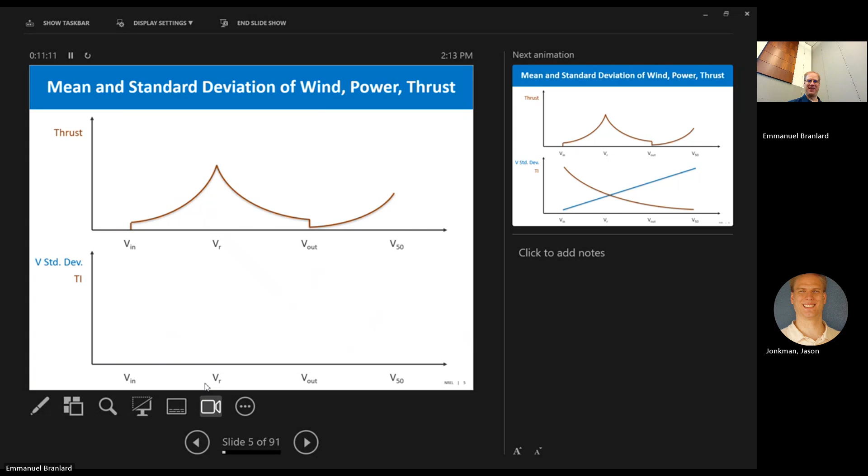So if we start looking at turbulence, what does the standard deviation of the wind speed usually look like as a function of wind speed? Standard deviation constant, increase, decrease? Which way does it go? The standard deviation is large at the beginning, V in, and gets smaller. I'll push back against that. Anyone else? Flip that. So actually, standard deviation tends to go up. TI, I think, is what you're thinking of. TI tends to go down.

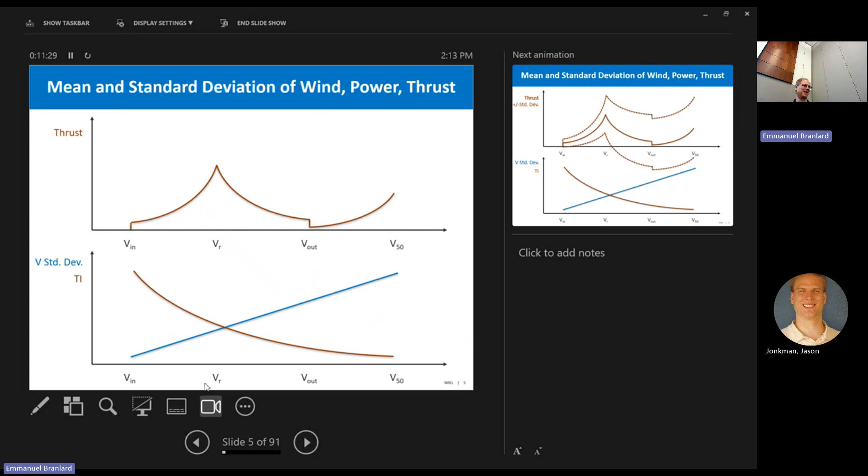That's because you take the standard deviation divided by the wind speed, and the mean wind speed is very low, so the TI is very high. So TI is going down, but the standard deviation is going up, and that's really why you shut down, because that variation is so much larger. If you add the thrust plus or minus some effect from standard deviation, the way I show it here, at cut-out maybe the fatigue is still lower, but eventually that fatigue is going to kill you. And that's why you shut down the machine.

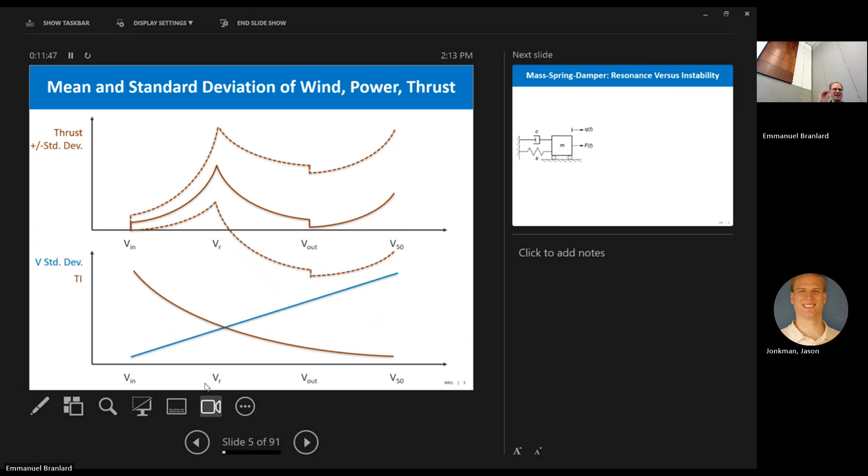Next, I love the simple example. So the mass spring damper system: mass M, damping C, stiffness K, and applied force F. My first question, of course, what's the equation of motion of that system? Just give me the equation of motion. What does it look like? Right, exactly. F equals ma. That's the basic equation I want. What is it for that system? Excellent. So mass times acceleration plus the damping term plus the stiffness term equals the force. So F equals ma for that system.

Great. And then my next question is, what is the difference between a resonance and an instability of that system? So I have a very simple mass spring damper. What does a resonance look like? Was that stored energy? What does it mean in terms of the equations? So if I have just F, K, C, and M, what does a resonance look like?

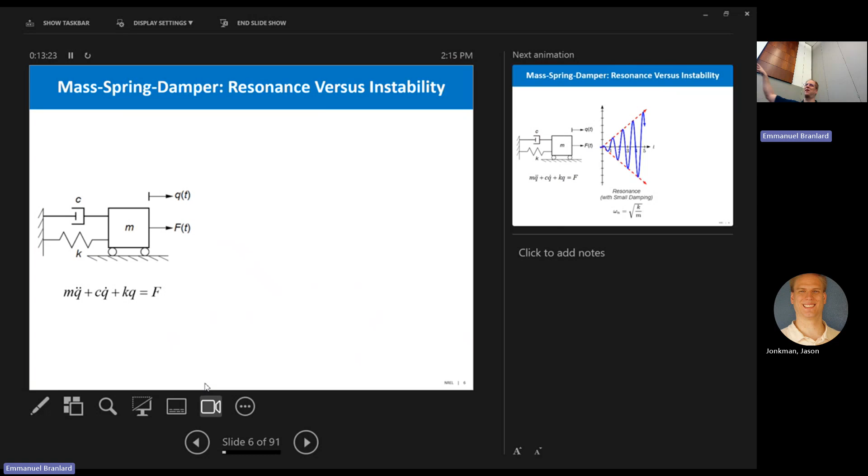Actually, resonance has nothing to do... Well, the damping plays a role, but it's not directly in the fundamental equation I'm looking for. Exactly. So if the excitation frequency F matches the natural frequency of that mass spring damper system, then you got resonance. And what happens in resonance?

Basically, again, that excitation frequency matches my natural frequency. And if you plot that out, it leads to linear growth. Linear growth is pretty bad, but it's not the worst thing that could happen. So if you catch that, you can maybe change natural frequency, add damping, try to mitigate that. So it's bad, but actually instability is far worse than that.

And what's an instability for that system mean? What do you have to do for one of those terms to make it unstable? Negative damping, exactly. So if I make C negative and I do the same thing, boom, that thing's going to blow up, and it's going to blow up exponentially, which is far worse than linear.

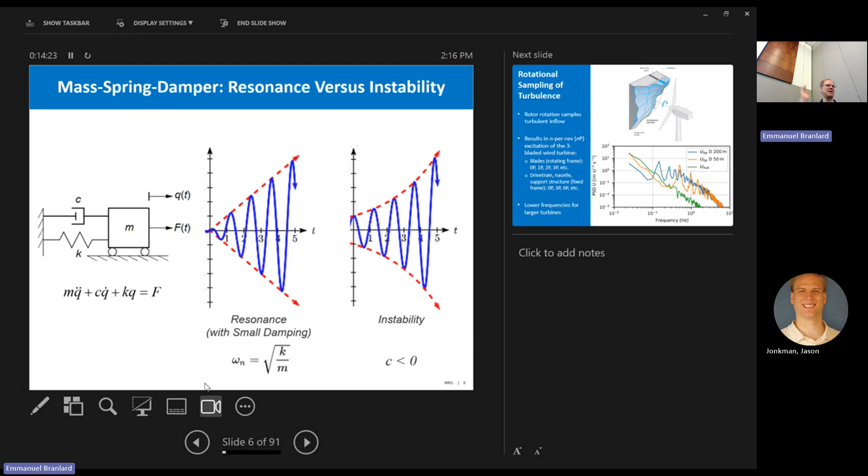So definitely want to get around what resonance is, or if you're in a resonance, you want to pass through it quickly. You don't dwell on it. Instability you want to avoid, because that's boom, that's exponential. That's key there. Another one, rotational sampling of turbulence.

No question here, but yeah, so a turbine spins through a turbulence field, and really what you see on the blade is, of course, the mean load from the wind, but you'll then see a 1P, 2P, 3P, and that's because the blade's chopping through all that, and it's sampling at basically harmonics of its speed.

And then in the drivetrain, and then the nacelle and the tower, you're really exciting at 0P, 3P, 6P. So if you ever look at PSDs of your time series of OpenFAST, you'll see these spikes show up. So you'll see natural frequencies and you'll see these excitation frequencies. Again, the resonances are where these excitation frequencies align with your natural frequencies.

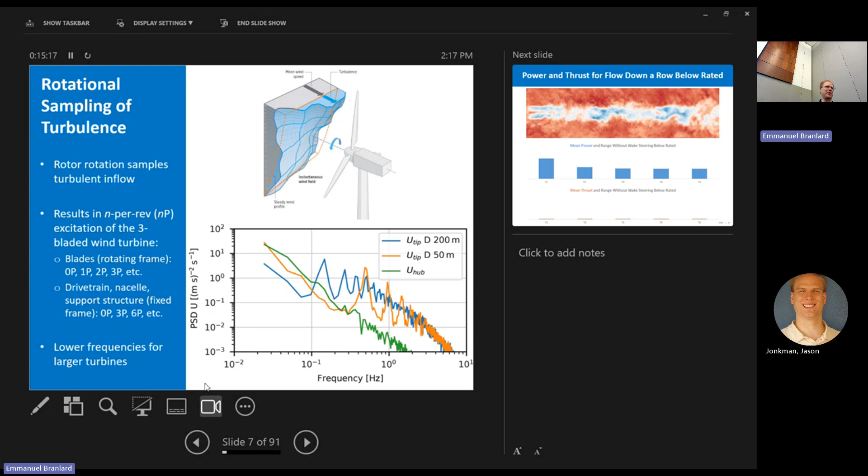And another thing maybe important there is as you get larger and larger turbines, you're spinning slower and slower, these frequencies are basically dropping. So they're all getting lower and lower. So keep that in mind. Now we take that to the farm level. So a little too far there.

So now I have 5 turbines in a farm. That's showing a FAST.Farm simulation there, I don't really show the turbines well. There's 5 turbines and the flow is moving from left to right. And so now if I look at a simple case, I'm not trying to steer the wake and I'm below rated wind speed, what does it look like for power? Which turbine sees the highest power? Which sees the lowest power?

What's that? On power? I'll flip that on you. So the upstream turbine is going to see the highest power, right? It's going to get the full effect. Sorry, without wake steering, yes. Start simple. So the upstream turbine is getting the most power, and the other turbines in the wake are losing power off that. And what about thrust?

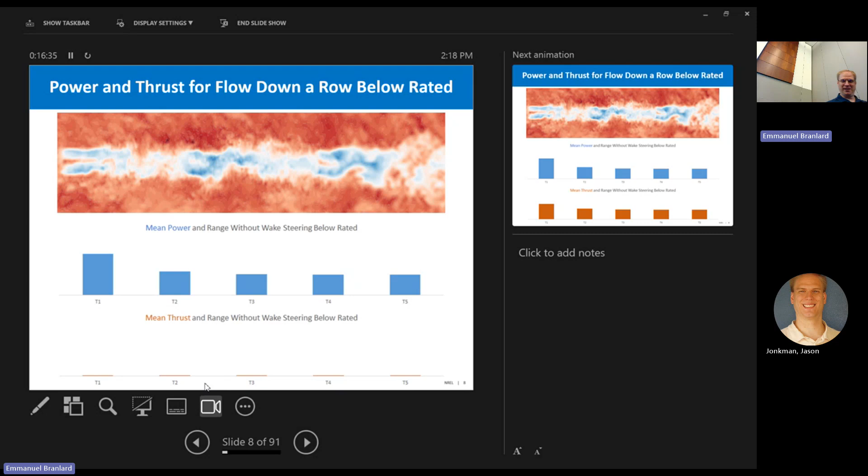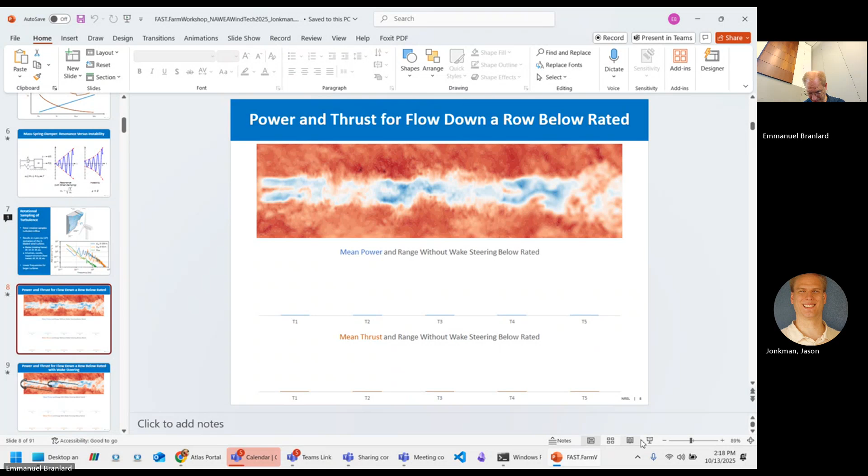So I agree. Same trend. Thrust is lower. So normally you'd say, well, fatigue is higher downstream, but thrust is actually lower. So what's going on? Exactly. So standard deviation now. That's what really changes. And if you're in the FLORIS workshop, you don't care about any of this stuff. You only look at means. And here we're talking about loads. So standard deviation really matters.

So about standard deviation, I try to draw it as a range. So the standard deviation of power also goes up quite a bit. Standard deviation of thrust goes up, and that's really the big problem. Your fatigue loads are going way high. So the mean loads may be going down, fatigue loads are going way up, and that could be a big concern downstream.

Now, if I look at what you were trying to get at, wake steering. So again, I'm below rated, and I have wake steering. What does my power look like now? What is the trend going to look like? Kind of the same? Is it more or less equal throughout the farm?

More equal, yes. I should have showed it before and after, but turbine 1 actually went down a bit because I purposely yawed the flow, but that made the wake diverge away, and I've made overall power more level throughout the farm. Same thing happened to thrust. What happens to loads?

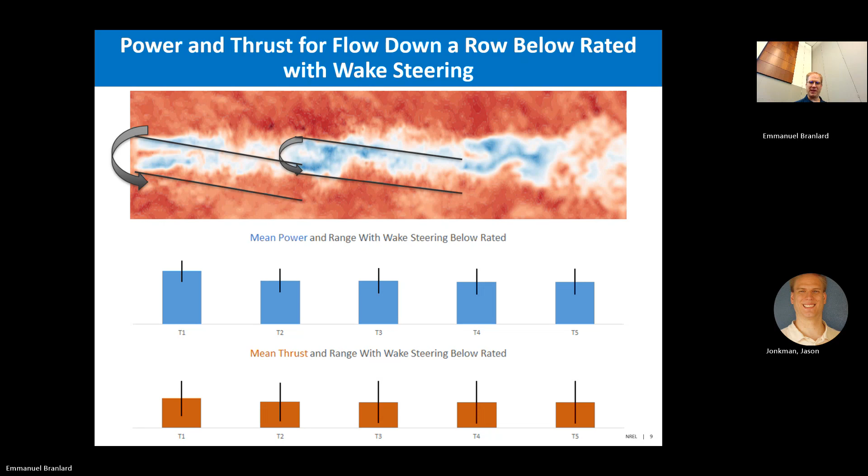Right? This is certainly maybe an ideal case when I'm showing 3 turbines or maybe 5 on the plot. I'm just trying to show the trends. But certainly, if you have some complicated wind farm arrangement or flow directions, these trends could obviously have local effects. Exactly, but that's why you use a tool like FAST.Farm, to answer these questions.

Maybe one more example: I've taken the same case, but I've made it above rated. So now I say winds at 18 meters a second. What's my power look like? What's that? Pretty much constant? Exactly. What about thrust? Thrust reduces relative to the below rated, certainly. What's the trend down the row? Exactly. Good point. Good intuition, Stevie.

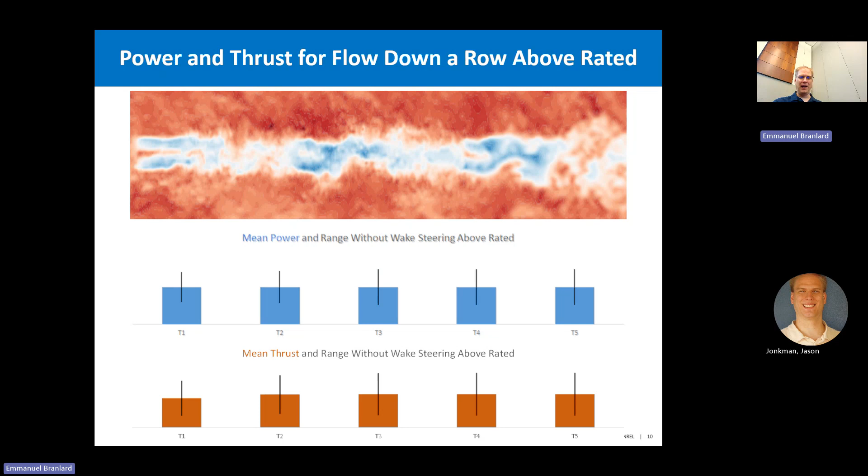Look at that previous curve we showed. The downstream turbines are now in the wake, so their wind speed's less, which means their mean thrust is higher. And so again, power is basically constant. Thrust is also fairly constant because that wake is pretty much diminished at that point. CT is very low. So slightly increased, but not a whole lot. And then standard deviation, again, fatigue could also be important for above rated cases. Yeah, it's not a big increase down the farm for that.

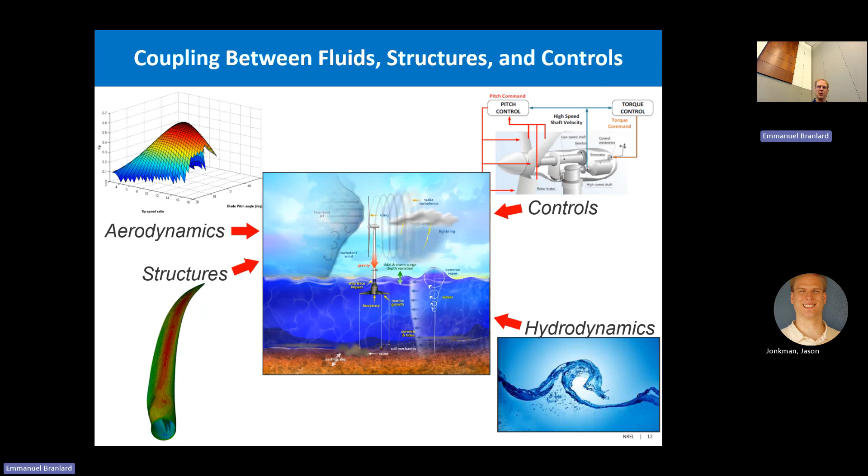Okay, so that hopefully gets your mind around these things again after a long weekend or a little break. Now we'll start jumping into the tools, OpenFAST and FAST.Farm. Really what we're trying to do is analyze the various physics: the aerodynamics of the system, the structural response of the system, hydrodynamics if we're talking about offshore wind, and of course the control system being a big part. It's not just a passive machine, it reacts to its environment through a controller.

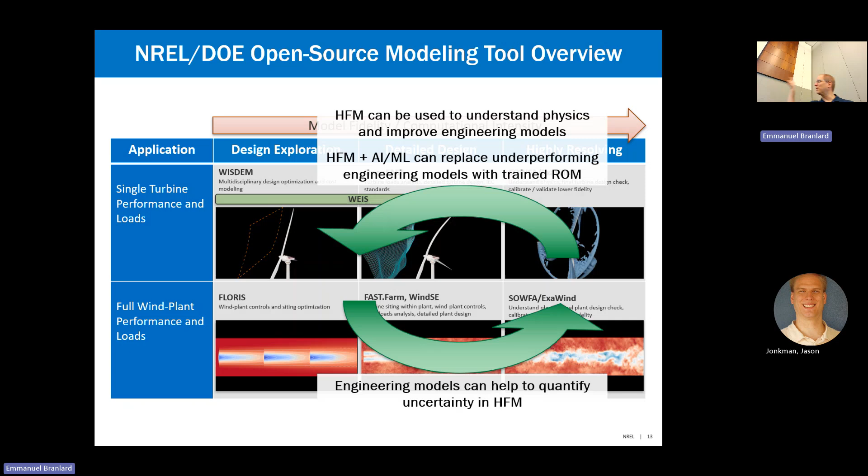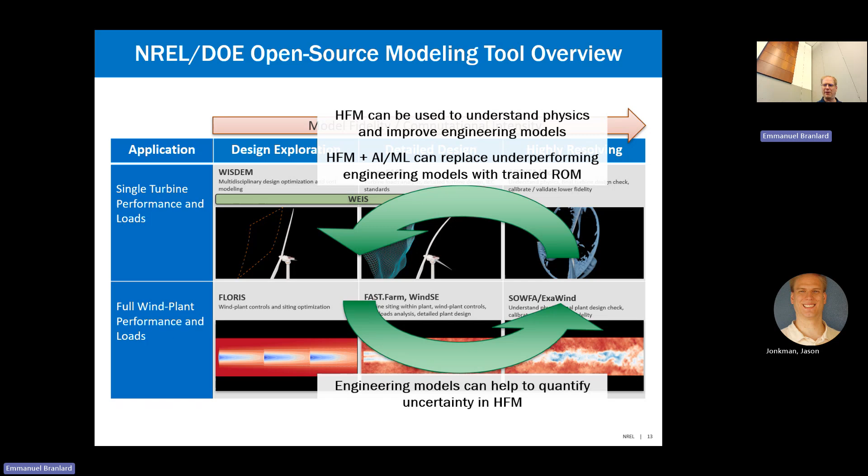And I would say these are very much interacting environments. We use a lot of the high fidelity to generate inflow for the engineering models, as well as a lot of calibration and validation of the tools from high fidelity to low fidelity. And I think this is also where AI and machine learning will really come into play: how do we train surrogates that mimic what the high fidelity is doing. The partnership goes the other way as well, because we can run a lot more cases at the engineering fidelity. If we're trying to propagate uncertainty, it's much easier to do that with an engineering model, so using that to forward propagate high fidelity solutions is a direction I see. But here we'll focus really on the farm level detailed design work.

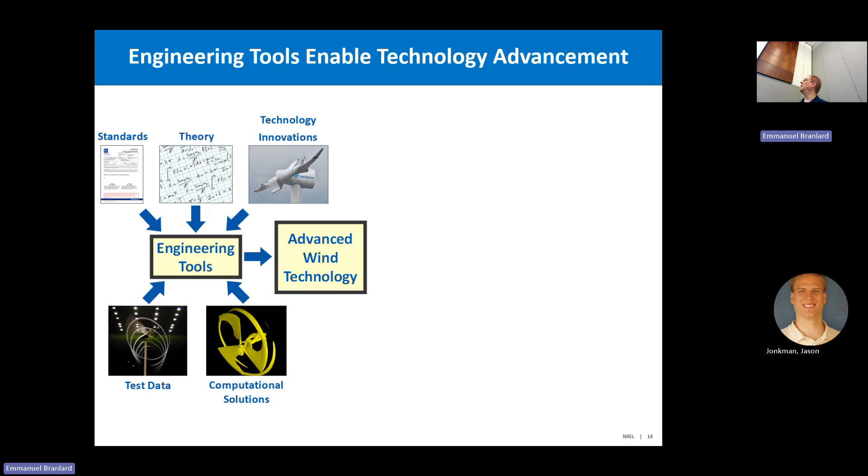Tools enable advanced technology. Because we can't fully resolve everything with CFD and make that computationally efficient, at the end of the day we have to simplify some of the physics, and you'll see a lot of that as we go through FAST.Farm. But based on fundamental theory, and on computational solutions from which we calibrate coefficients of the model, we have an engineering model that can run all the cases we need to advance technology. At the farm level, that's really about designing my wind farm including not just power but also fatigue loads, and all the implications on other technologies. If you're looking at novel rotors, drivetrains, or support structures, you can do all that at the farm level now with FAST.Farm.

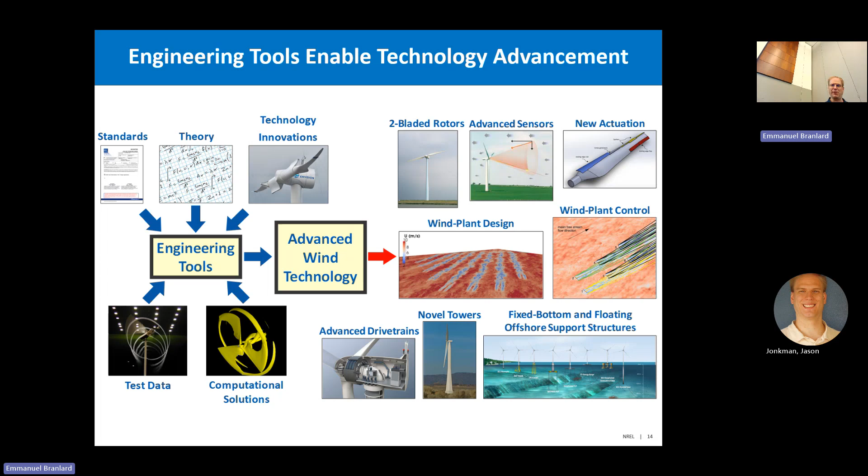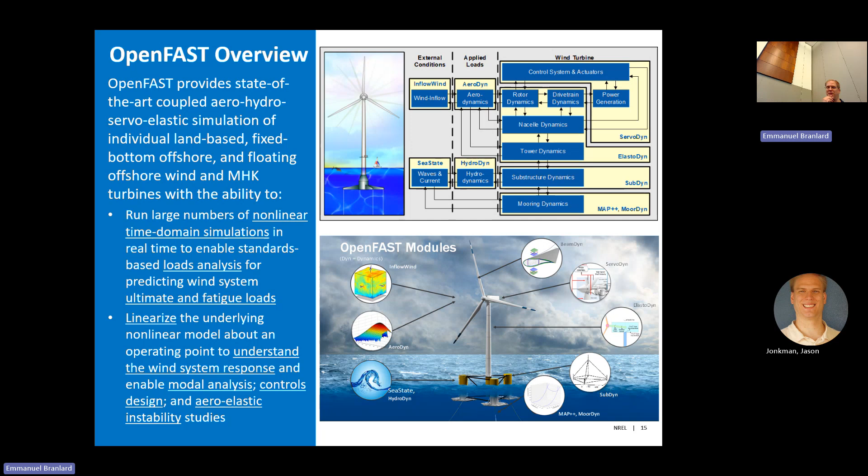We won't go through these in detail, but BEM type aerodynamics, also up to free vortex wake, and OpenFAST beam type structural models, with bending stiffness, EI, GJ type stiffness terms, and of course full hydroelasticity on the floater as well. We won't dive too much into that today. Some of the key things in the framework that I think are still very useful when we talk about FAST.Farm are summarized here, because FAST.Farm is based on the same framework of OpenFAST. So to understand FAST.Farm, we really need to understand the modular architecture of OpenFAST.

And so we have, first of all, everything decomposed in the model in terms of modules. And those modules really have four main components to them. Internally, they have states and they have parameters. So parameters are like the constants of the model that don't change, and states are what you need to know to calculate the things at the next time step. So the memory of the model is what's stored in the state. Inputs are what are calculated from other modules and being sent to a given module. So that's what this module needs to do its solve based on information that's external. And the outputs are what it's calculating for the purpose of other modules.

We use that very much as context for FAST.Farm as well. And as we go through FAST.Farm, we'll explain what are the inputs, what are the outputs, what are the states and parameters of that model. The states in the model, again, this is like the memory of the model. They can be in really three forms. One is continuous time. That's the ODEs that we showed before for the mass spring damper model. You can also have discrete time form where it's really a time step by time step solve. So given things now, I can figure out what it is the next time step, but there's nothing continuous in between. Often you can take a continuous function and solve it numerically with a discrete time formulation. And there's constraint states, like the algebraic constraints of the solve. And other states, sometimes we show things like binary states and so on.

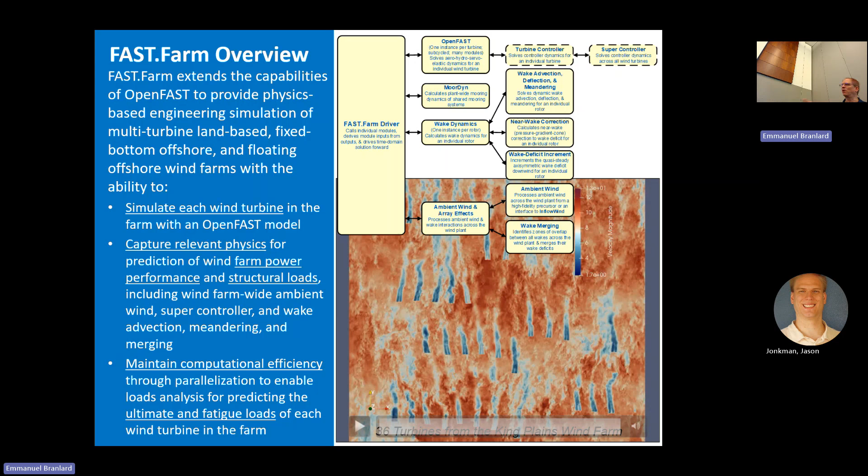But yeah, so the idea is to have one instance of OpenFAST for every turbine, and then modules, and we'll get into the details of those modules that solve the wake propagation, the wake evolution, the wake meandering, wake merging, and that's all part of the solve of FAST.Farm. So we'll jump into those as we go forward. Just make two more points before we dig into the details.

One is on verification and validation. I think this is sort of central when we talk about OpenFAST or FAST.Farm, because we're not fully resolving all physics. It's really important to either calibrate the model against some high fidelity solution, and then finally at the end of the day, validate it. So the reality of interest could be a high fidelity CFD solution. It could be measured data from a real wind farm.

But the validation is really critical, I would say, in tools like this, because there's a lot of these parameters that can be case dependent. So also pairing it with high fidelity is quite critical, with the goal, again, of using these tools for advancing technology. Finally, just one comment.

This is all public open source data under an Apache 2.0 license. And that simply means that we're indemnified. So if you use the turbine and you use the software and it doesn't work for some reason, you can't sue us because you basically have to agree to this license. It's also fully open source, meaning you can take the code and repurpose it for anything. You can even resell it. We can't stop you from doing that. It's a very permissive open source license.

But yes, maybe we'll stop there and ask any questions before we dive into details of what's going on inside FAST.Farm. Anything yet? No. Okay, let's dive into the various modules of FAST.Farm.

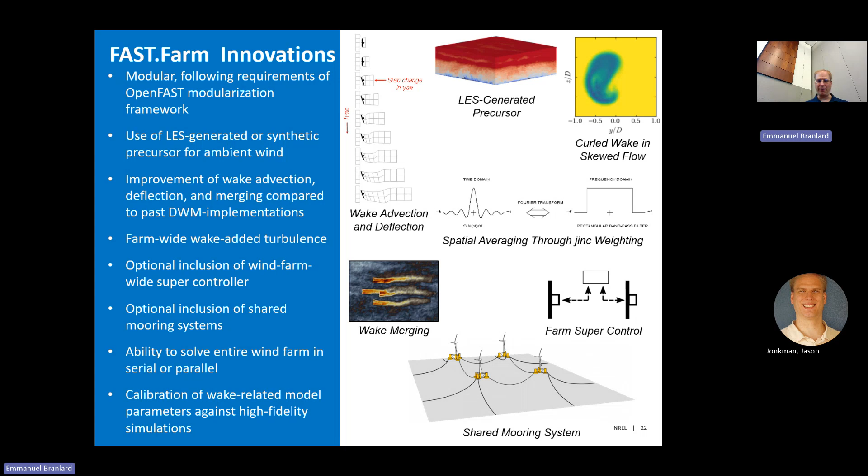The parallelization of the implementation has been done, and I'll showcase some advancements we've been making to that recently to make it a lot more efficient. And a lot of calibration against high-fidelity models. So again, we'll step through those. First of all, some basics.

Basic terminology on FAST.Farm. It really operates on three main things you have to understand for the FAST.Farm solution. First of all, there are two inflow domains. One is what we call the low-resolution domain, and this is a pretty coarse resolution around the whole farm. So wherever there's going to be a wake in the farm, you have to put this domain there, because it's what does the meandering calculation.

So that's coarse both in time and in space, and we'll give you guidance on what the time step and space requirements need to be. But it's really coarse, usually a couple seconds on time step, and 20 to 30 meters, say, for spatial resolution, but it depends on the case.

And then there are also high-fidelity domains, and this is really because the OpenFAST solve, or whatever elastic solve you're using, needs a pretty high-resolution inflow. So you're talking about hertz for time scale, and say chord length for spatial scale. And for the elastic solve to get an accurate inflow, it needs that high resolution.

So we really split out FAST.Farm that way, with the two domains, so we capture the best of both worlds. If you made the low resolution the same res as the high resolution, it would obviously work, but it'd be much more computationally expensive. And then the final thing to keep track of here is the wake planes.

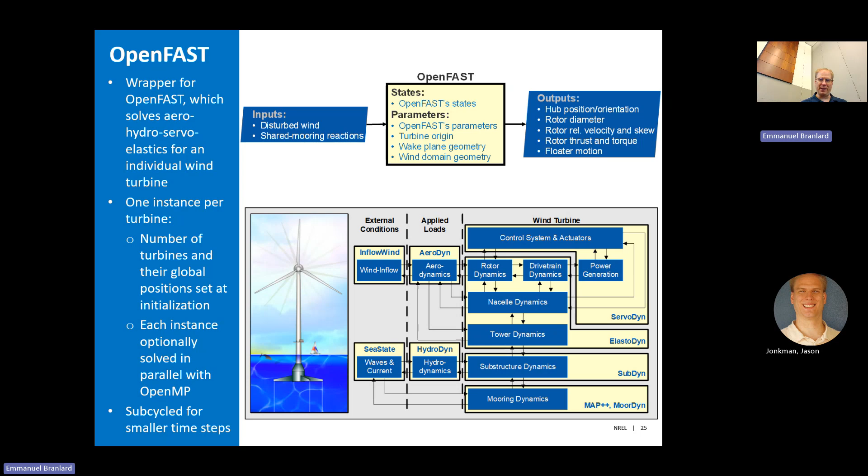Supercontroller, again, that module has really been evolving with the work of Abhinav recently. But right now we're basically fully relying on how we do it through our DISCON interface and ROSCO. We've added this ZeroMQ protocol to basically transfer data between your controller and OpenFAST, as well as controller and other controllers. Through that ZeroMQ data passing interface, we've now set it up so that works with our supercontroller.

So Abhinav is working on this reference supercontroller that has, correct me if I'm wrong, Abhinav, a combination of a consensus control algorithm and a wake steering algorithm. It'll basically become our reference open source controller for wind farms that you can then take and use for extending any sort of wind farm control setting. I don't know if you have any updates you want to share on that. I don't have much detail here, but it's just high level.

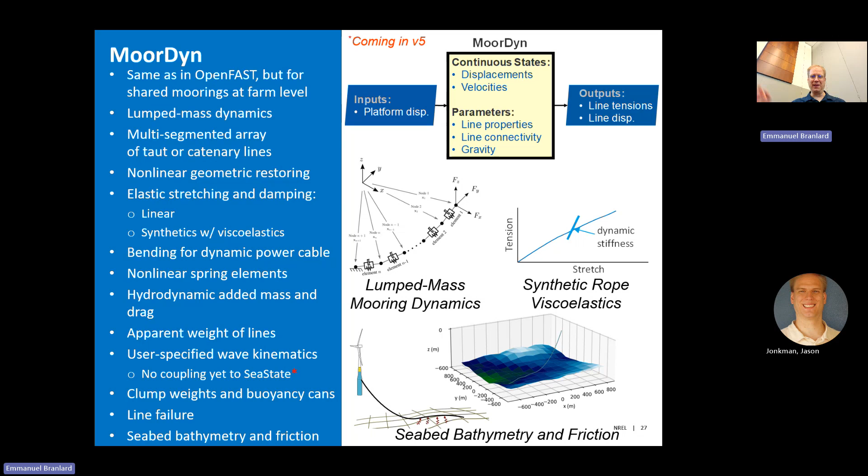It's basically getting the positions of the turbines as input, calculates the line tensions as output, and that's how it couples in. It's a pretty low level connection. And internally, of course, it's basically solving F equals MA for that MoorDyn instance. A lot of features of MoorDyn there, like synthetic ropes and seabed bathymetry and so on. But won't talk too much about that because this is about FAST.Farm.

Okay, so now we'll get to really the meat of what FAST.Farm is doing. Again, there's two main blocks we need to go through. One is wake dynamics, and one is the ambient wind and array effects module, and of course how they get linked together. So first of all, for the wake dynamics, right now it's set up so it's dynamically allocatable. So we take this module and we say, okay, if there's n rotors, we have n instances of these modules. So basically one solve for every wake.

And what it does is it solves that wake evolution behind that rotor. I would say this is where most of the CFD calibration parameters are. And so overall, we've not had to make too many changes when we switch FAST.Farm from one rotor to another, but there's a few things you could definitely calibrate better if you have an LES solution of that. So if you really want that wake evolution to show up right, it's great to have some high fidelity reference cases and calibrate some of these parameters to the reference solutions and get a better solution.

So how does it couple in? Again, you can see the inputs going in there. We need to know the position and orientation of the hub at that time step. We need to know the relative velocity and skew angle. So overall, where's the wind coming in? We need to know the ambient TI and ambient wind, and that's really used in our eddy viscosity model. We need to know the thrust and torque distribution for its solve, and we need to know the velocities of every wake plane. Those are calculated by other things.

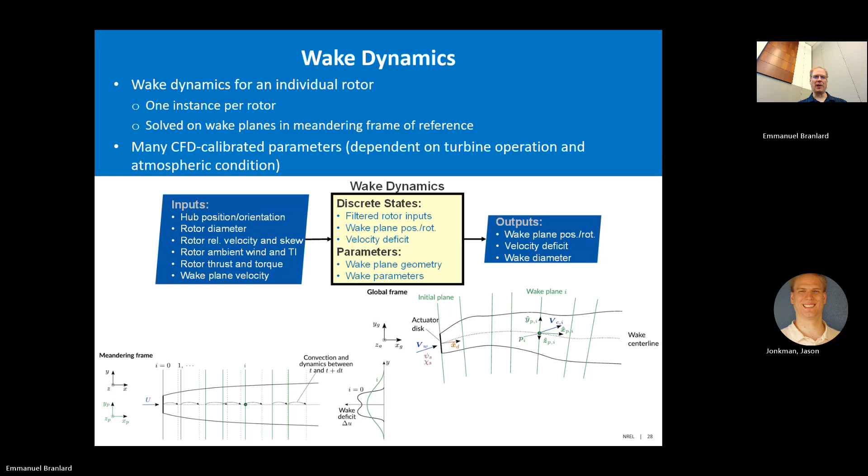So some of the details here. The first bullet maybe is in a little wrong spot. But first of all, we use a passive tracer. So the wake dynamics tracks that passive tracer, but the actual velocities of the wake planes are solved externally. You saw it as an input to this module. We'll explain later how they get solved. But what happens here is at every time step, it says, well, what's the thrust now on my rotor? And I compute a wake deficit from that. And then this module will propagate that deficit downstream.

Because our wake deficit evolution model is effectively a quasi-steady model, we can't throw a lot of dynamics into it. And so we basically low pass time filter everything that comes in. So all the inputs you saw coming in, like the thrust distribution, all get low pass filtered. So we only let low frequency, so we can track small changes over time. If you have a gust come or something, but you can't do it instantaneously because the model is really not meant for those high frequencies. Yeah.

Yeah, so we'll get into that a bit more, but basically the next turbine downstream will ingest whatever is coming on upstream, whether it's one wake or multiple wakes. And it's very much a local effect in the sense, wakes get superimposed locally, but then the turbine will ingest that and calculate its wake from that inflow. So it's not like a global superposition that FLORIS has.

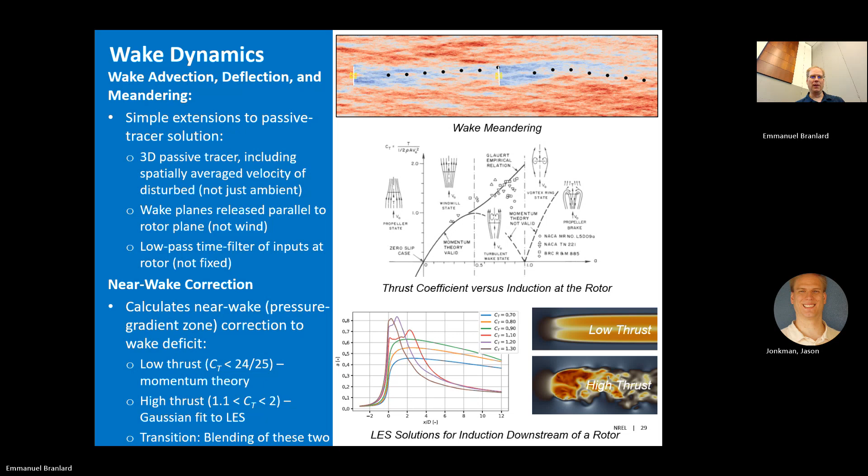So it's a polar solution, axisymmetric. Basically, it solves what we call the thin shear layer approximation of Navier-Stokes. So it solves the continuity equation only axially because it's axisymmetric. It also solves the momentum equation. It does this with a second order Crank-Nicolson scheme. The main thing about how to solve that is how do you handle the closure? So how do you get, say, the viscosity in that model?

And we have this eddy viscosity formulation that really takes 2 things to estimate what the viscosity is for the momentum equation. One is the ambient turbulence. So the higher the turbulence, the more viscosity it says is in that model. The other one is the wake shear layer. So the higher the shear in your wake, the higher the viscosity and the quicker it will recover.

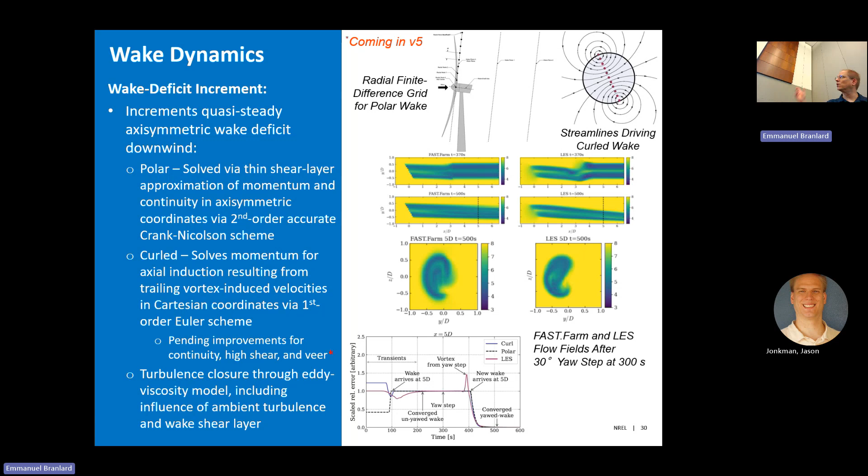So those are the 2 options you got for the wake deficit: polar, really simple, and same as what DTU had done originally, and curled wake, a nice advancement to that. Now we step into the next main module of FAST.Farm. That's this ambient wind and array effects.

If you first look at a high level at what that module is doing, it's taking, again, every wake plane that was solved in our wake dynamics model. So it takes the position and orientation of that plane, also takes the velocity deficit of that plane, and the wake diameter from that velocity deficit. So those are the things it's taking in.

What it's calculating is this disturbed wind field of the farm, of both the low and the high res domain. It's calculating the ambient wind and TI that's needed in wake dynamics, and it's calculating this meandering plane velocity. So every wake plane gets a velocity assigned to it, and that's calculated here in this module.

One thing that's very interesting about this module, it actually has no states at all, so it has no memory, which makes the solve much easier. Only based on those inputs and the parameters of the model, it can solve its output. Parameters in this case, the main thing is the ambient wind. So you have to pre-compute what the ambient wind field is, and that basically is a parameter of this solve.

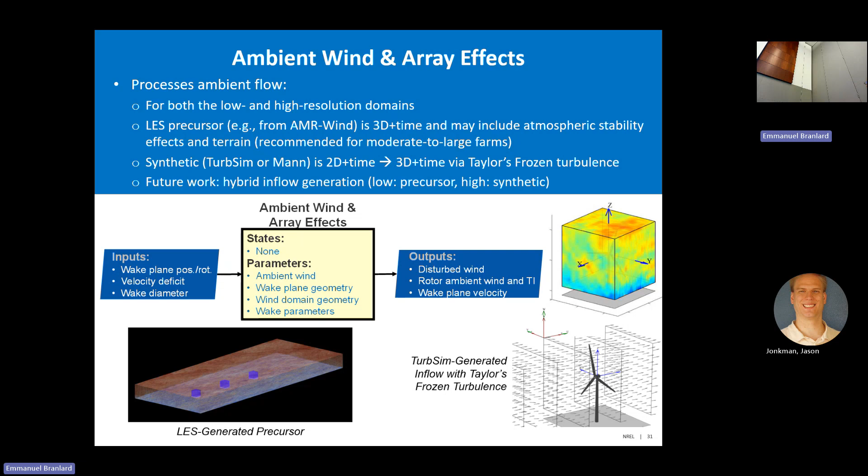So that's the first thing we do, process inflow. The next thing we do in FAST.Farm is what we call the wake overlap and merging calculation. So again, if you're talking about a region where there's multiple wakes overlapping, this is where we do a superposition approach. Just to clarify, it's very much a local superposition rather than a global superposition. Whatever wakes are overlapping that point get summed together. But the turbine itself is really feeling the effect of the wake, and it calculates it based on that wake.

So it's not a global effect where, to calculate the wake of turbine 5, it solves turbine 5 independently. It has to know everything upstream to do that. So it's very much a local superposition. So how does that work? Right now, we take that wake deficit from every turbine or every wake that's overlapping, and we do a root sum square, which is like an energy preservation superposition. We do that for the axial wake deficits. For the transverse, we just vector sum them. And that's how we see the effect of two wakes coming together.

One thing about the solve is it requires that you loop through all the grid points, all the turbines, and all the wakes. And you can imagine that's a pretty big loop. If we do the math on that, that's basically an N squared loop, where N is the number of turbines. So the more turbines you have, the solve gets quadratically more expensive. We actually are changing that right now. Basically, if I can pre-compute up front what area we expect that wake to be in, I can make that n squared solve an n log n solve, and make it much more efficient. And so that's coming soon in version 5. That's being worked on right now.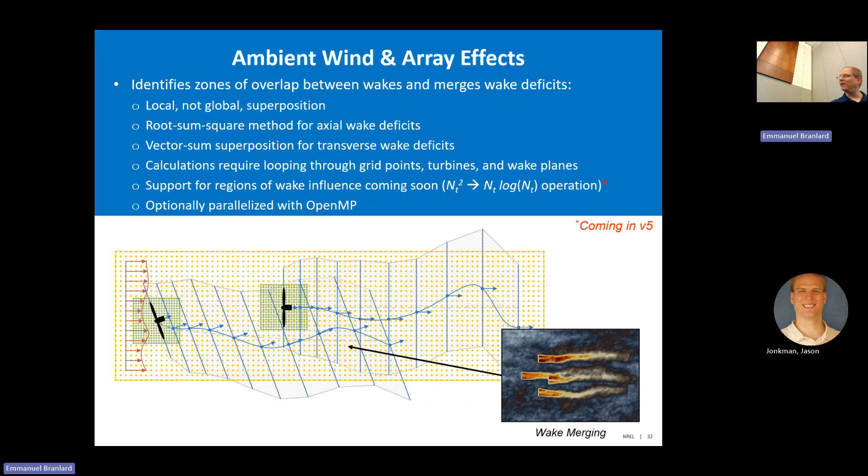Excited to see that. But because right now it is an n squared solve, all these loops can also be done efficiently through an OpenMP parallelization, because every point can be solved independently of everything else. So the more cores you throw at it, the faster that solve will be as well. I'll talk a bit more about that scaling of computational cost when we talk about the glue code.

The third thing that ambient wind and array effects does is calculate this wake meandering velocity. The simple way to calculate that velocity would be to take whatever the ambient or disturbed wind is along the wake plane and just average it out, and say that's the velocity it should go in. And that is one of the options we have, this uniform weighting function shown in blue on the curve. It uniformly weights all points, and that's the velocity given to that wake plane.

But if you know things about signal processing, say this time-frequency domain transform shown there: if I take a step or uniform weight in the frequency domain, in the time domain that ends up as this jinc function, or sinc function if you're talking about 1D. So we've taken that idea and flipped it around: if I want a nice, clear cutoff in the frequency domain, I need to spatially average with some weighting that's not uniform. In this case, we use this jinc spatial weighting. The nice thing is that in the frequency domain it gets a clear cutoff, so only low frequencies affect meandering and high frequencies get averaged out.

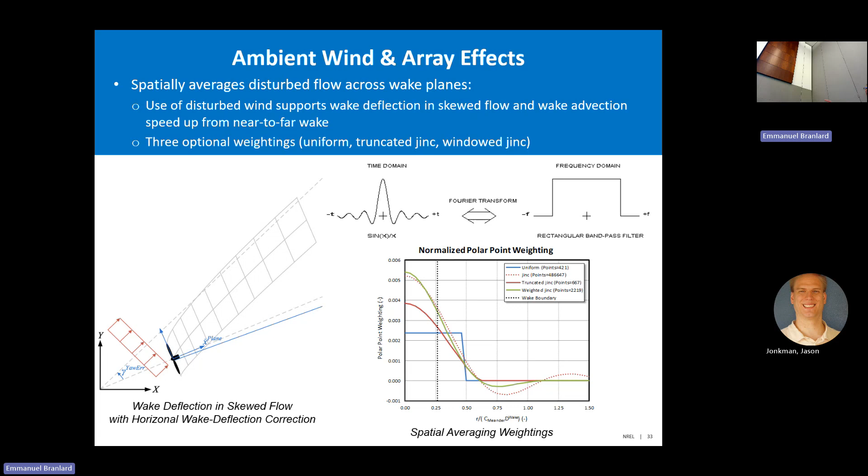But nevertheless, as you move from uniform to weighted jinc, your wake plane needs to be wider to capture that weighting effect. So our guidance for how big the wake planes need to be is all tied to that, assuming you're going to choose the weighted jinc option, which is generally what we recommend. So again, we spatially average the wind across the plane, but we don't just uniformly average it. We weight it by that function.

The final submodel of AWAE is the wake added turbulence model. I showed the picture on the upper left before. So that's uniform inflow without wake added turbulence. The main idea here is that we calculate this wake deficit, and wherever there's high shear or high deficit, we have a factor on that, and that factor scales that deficit with a uniform isotropic turbulence, and thus wherever there's high gradient, we add turbulence and superimpose that turbulence onto the background flow.

One thing we're doing quite differently than, I believe, in dynamics is we do that through a whole farm-wide wake added turbulence domain. And so that gives the farm-wide effect of wake added turbulence. And there's implications there, like that added turbulence can meander the flow a little bit more. So in a very stable case, you do get some meandering because of this effect. So it's like a secondary meandering effectively.

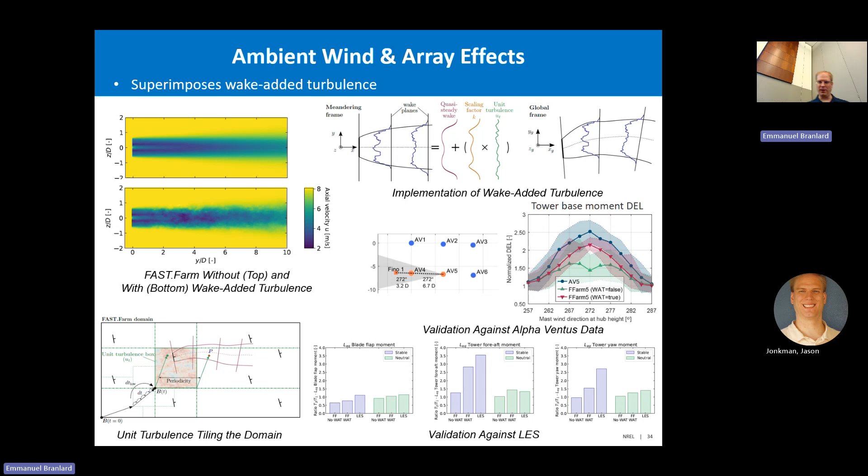Just showing a couple examples where we validated that model. The one in the middle there is against the Alpha Ventus wind farm in Germany, where the flow went through the FINO 1 met tower and hit the two turbines, with and without wake added turbulence, because this was a fairly stable atmospheric case. With wake added turbulence, we were able to capture the data well, but without, we definitely underpredicted the effect. And the LES comparisons shown there were from a TORQUE paper, I think last year. So that's the main effect there.

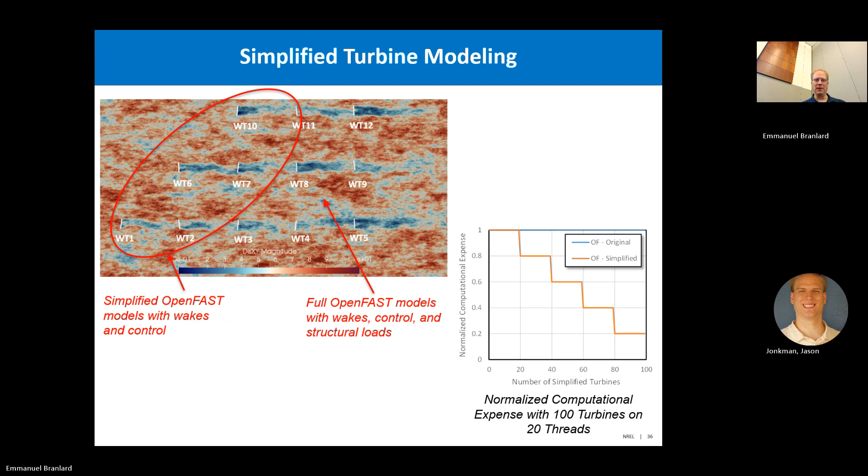And you can use it to match the number of turbines to the cores that you have. And you see the scaling, that part would go down in itself. Yes.

But usually, what we have is a subset of cases in LES to say, I want to match that. That's my benchmark. That's my truth. I want FAST.Farm to match that. Usually I have maybe 10 LES solutions, maybe just a few. And FAST.Farm, of course, you can run a lot faster. So say I run 10 LES and 10,000 FAST.Farm simulations, and I basically do a grid search on FAST.Farm to get my parameters to match the LES solution.

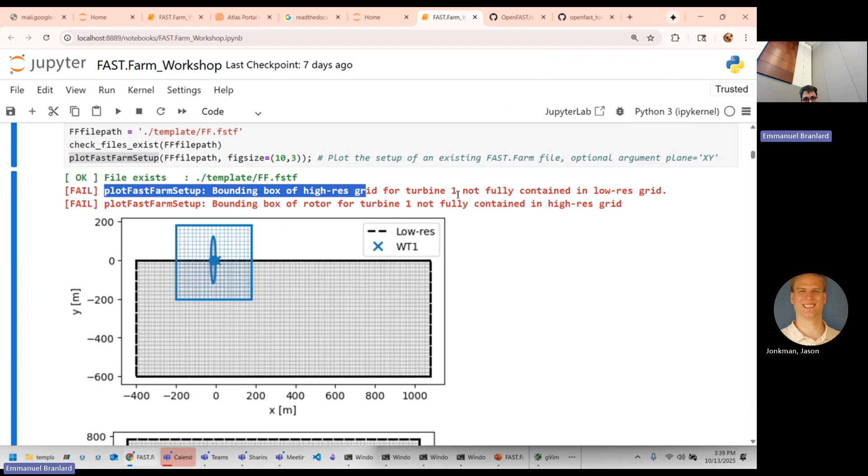So it's plotting those grids here below. In gray, I have the low res. In blue, I have the high res, and you can see how the high res is not contained in the gray box. That's the first error message. Second error message is the rotor is not fully contained in the high res box, and now you can see it. So this is like the top view.

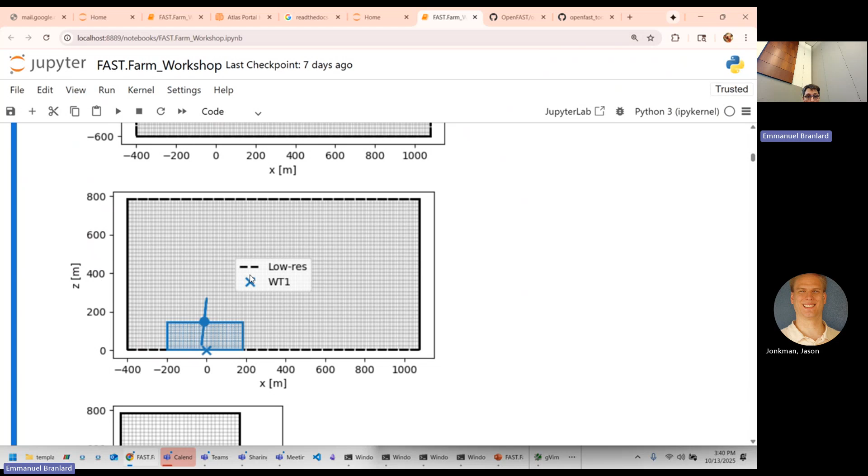I have X and Y. This is the XZ view. So it is like a side view, and this is the front view. And you can see how the rotor is not fully set up.

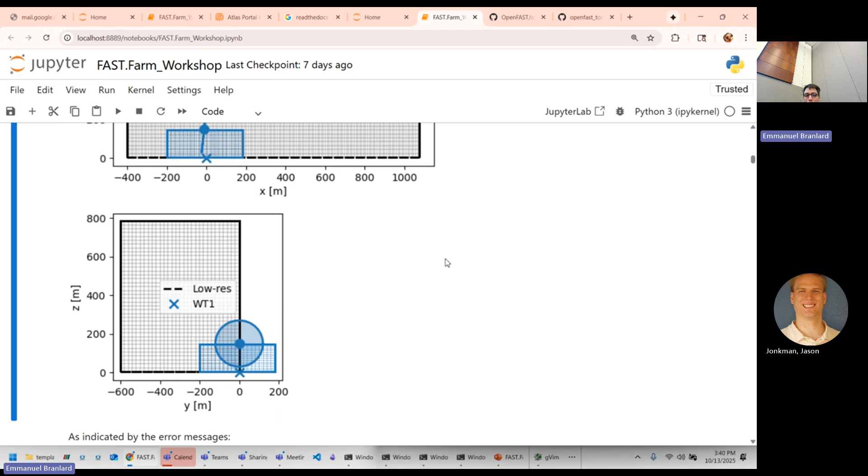And that happens. If you didn't have this plot FastFarm setup, you would have to think of how to set those parameters, or you would try to run FastFarm and it would give you an error like this one, like velocity outside of grid bounds. If you've ever used FastFarm, you've seen this error before. Yeah.

Yeah. So what? So it can still come if you do it manually. If you use the toolbox, it is making sure that you're never going to have this error. So you're going to like the toolbox. It takes a while to install, but then it sets up OpenFAST for you so that those errors don't happen.

Right now, this is just for you to try to understand a tiny bit the input, or if you want to become a bit of a hacker and modify those inputs yourself, you can keep running the cells. I'm going to show you how you can modify manually this input file. So you can run the cell, I don't know how much now, 7 maybe.

It tells you what are the parameters in the main FAST.Farm input file. For instance, we have the X low that shows up. We have the X0 low. So if you run the next cell, you can print what are those parameters, which is basically the same as opening the file and looking at those values.

And if I keep going, the main question for you, if you go to that cell that has some red text below, say modify the low resolution below. So you uncomment those lines, and try to find how I should set NY low. And I'm just going to say 30 at first. I think it was 31. Okay, so it was 31 before.